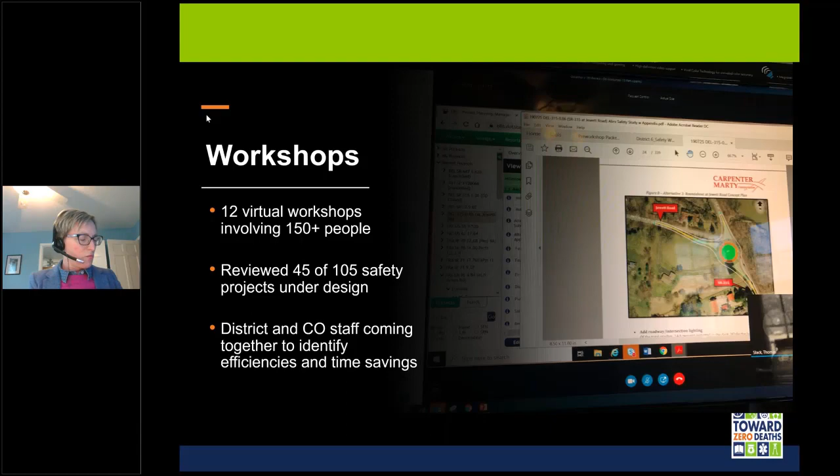And from here, I'm going to let my co-host or co-presenter today pick up the story. And while he's getting prepared to make his remarks, let me give you just a brief bio. So Scott is actually a longtime friend of ODOT safety program. He's been working with us going all the way back to the early 2000s. He is currently Vice President of Crawford, Murphy, and Tilly, and serves as the Ohio Surface Transportation Group Manager. He has more than 28 years of planning and design experience, applying performance-based practical design concepts on projects ranging from interstate to local roads, as well as urban and rural environments. He leverages national best practices and emerging safety research to identify innovative solutions. He's also a graduate of the University of Dayton. So Scott, I will let you pick up the story from here. Great, thank you very much, Michelle.

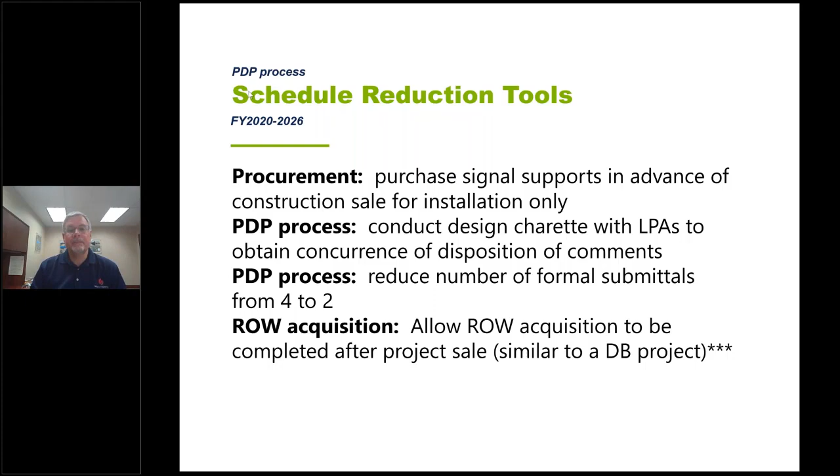The other item I'd share was a focus of the workshops: a discussion about primary and secondary countermeasures. The second question addressed was, are the solutions or countermeasures that increase the schedule critical to the safety goals of the project? This discussion not only has schedule implications, but also cost implications.

The strategy was to limit solutions to primary countermeasures to help expedite the safety benefits of the project. Clearly, if a primary countermeasure does warrant additional environmental work or property acquisition, which may lengthen a typical safety project, the goal is still to implement those countermeasures that provide the most benefit. I think what was a focus, though, was those secondary countermeasures.

Those can be introduced a couple of ways. Clearly in the study phase, there may be some countermeasures proposed, some more effective than others. But a scenario that does occur is where once the study is completed and it goes to design, there are often questions asked: why aren't we doing X, Y, or Z as part of this safety program or project that should be addressed?

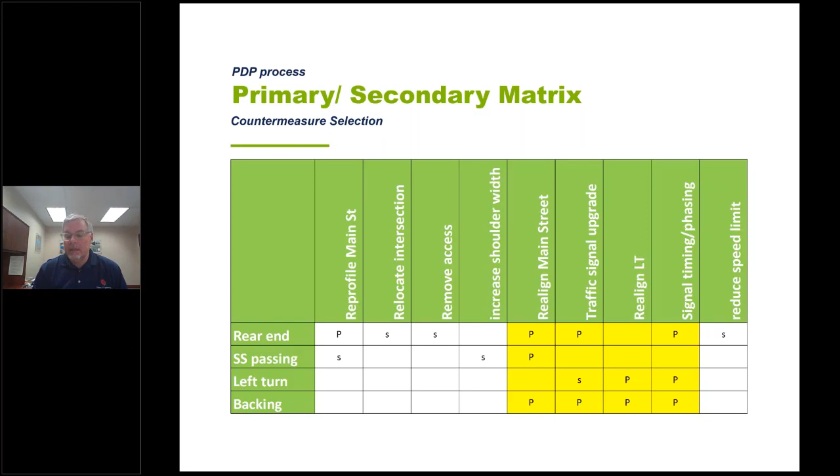So just a real quick rundown on a few examples to demonstrate this primary-secondary issue. One deals with right-of-way. On this particular project, the countermeasure was the construction of an exclusive right turn lane, actually on two approaches.

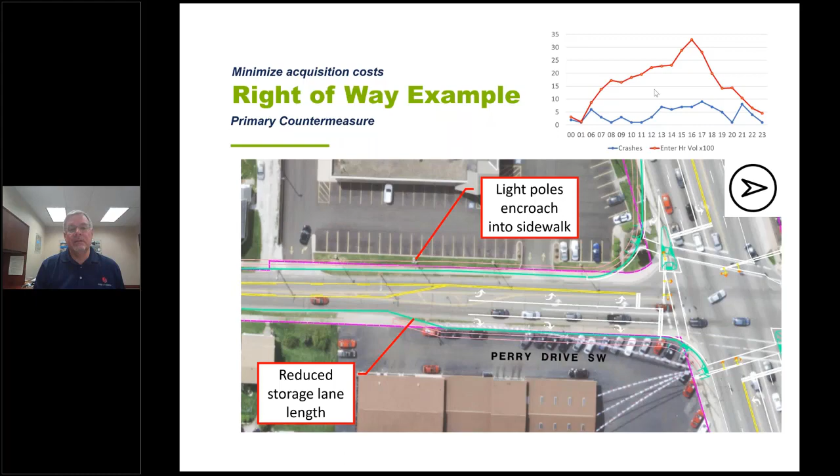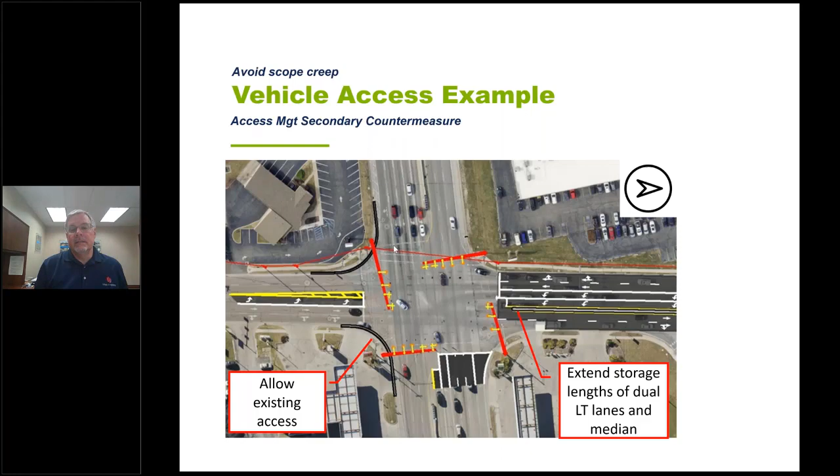The existing design was diagonal, such that left turners did not have a good view of the signal head when turning left permissively. The scope of improvements did not include pavement upgrades. As part of the design detail, poles were set to avoid impacts caused by turning trucks, but not necessarily resulting in a pavement upgrade project.

The decision here was that we did want to accommodate pedestrians better in the form of pedestrian signal heads, but we moved forward with a minimum PED timing on both approaches, since the volumes on these roadways were fairly equal. There wasn't really a major or minor street to favor, so it did not necessarily require the additional concrete sidewalk and ramp construction typically needed to accommodate pedestrians at this location, and there was no need for buttons or access to buttons.

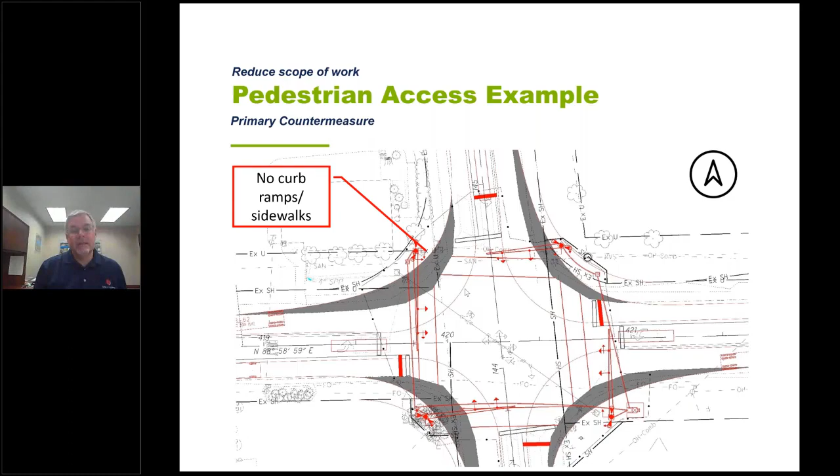As part of the study, it was determined that while the vertical clearance did not meet criteria, there were no crashes attributed to that issue. So from a primary versus secondary countermeasure perspective, the safety improvement focused on the directional ramps and did not address the existing vertical clearance issue.

So with that, that is the extent that I'll share with everyone, and we'll have more examples that resulted from the workshop. Great, thank you, Scott.

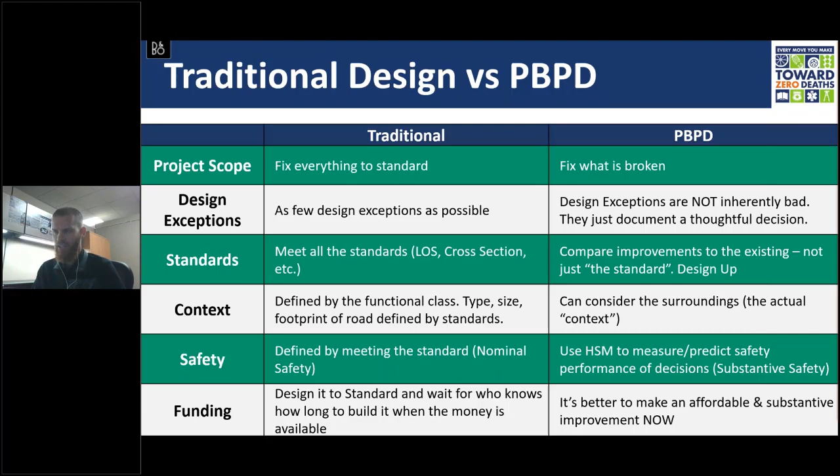PBPD uses the Highway Safety Manual, or HSM, to measure and predict the safety performance of the decisions being made. The HSM allows for a designer to quantify the impacts to safety that each alternative has. The most important benefit PBPD has over traditional design approaches is that it can yield an affordable solution that could be implemented now, instead of creating a solution that, while may meet all the standards, becomes so costly that nothing can be done until funding is available.

PBPD can occur throughout the project development process, or PDP. The decisions related to PBPD should consider and balance the benefits, disadvantages, costs, and impacts. And there are several key tenets to PBPD.

First and foremost, safety will not be compromised. With the ability to quantify the impacts and measure the benefit of mitigation strategies, solutions should not introduce or exacerbate a safety issue. For PBPD strategies, the existing condition is often the minimum standard, and the project will look to improve upon the existing condition.

The project's purpose and need should address specific problems supported by data, and the design should adhere to the purpose and need. The PBPD solution should be consistent with the context of the corridor that maximizes the benefit-cost ratio as an optimized combination of mobility operations and other modes.

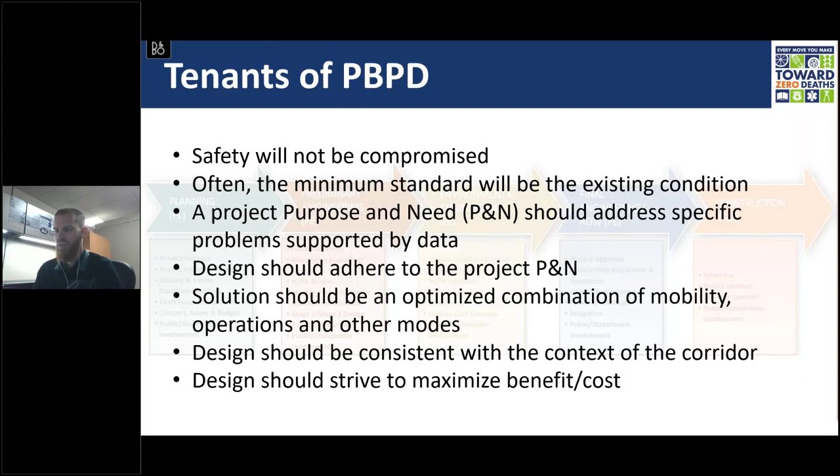So let's break down the PDP and identify how PBPD can be implemented in each phase. In planning, PBPD establishes the need for a project by focusing on improving the critical items and not those that aren't impacting safety or operations.

This becomes the framework for defining two different needs for a project, which Scott covered in his presentation as well. But the primary needs are those elements that are truly causing the problem. The project must address these to the greatest extent possible. Secondary needs are those elements that may not meet standards but are not causing undue issues. The project may or may not address these depending on cost or impacts created by addressing them.

It is very important during scoping that these needs are identified and the delineation between primary and secondary needs for the project are well defined.

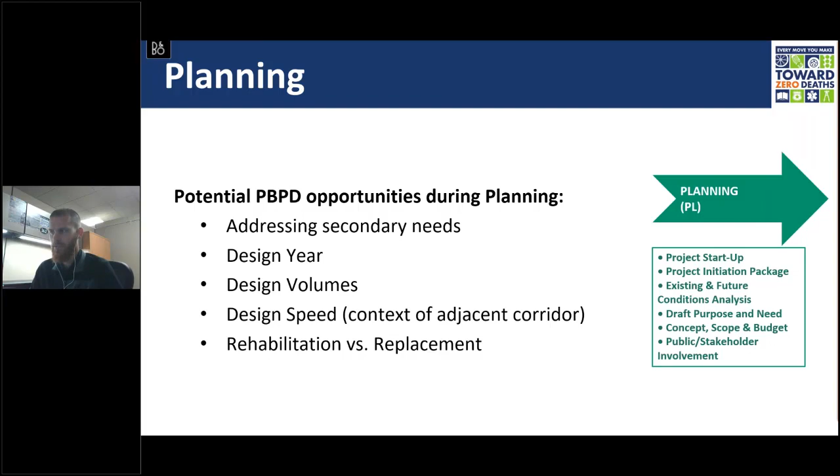There are several opportunities to implement PBPD during planning. Adjusting the design year for the project can offer beneficial solutions, especially when the growth projections come with a lot of uncertainty or if there is an opportunity to phase a solution. This can lead to adjustments to the design traffic volumes as well. Design speed is another aspect that can be investigated to be modified for a project depending on the context of the adjacent corridor.

During preliminary engineering, PBPD can be implemented during the feasibility study and alternatives evaluation report, or AER, phases. As a reminder of ODOT's PDP, the feasibility study and AER are used to evaluate alternatives to address the purpose and need, including impacts and costs associated with addressing the secondary needs.

PBPD decisions should be made in collaboration with all the appropriate disciplines, process owners, and approvers to avoid making any fatal flaw decisions and having to backtrack later in the process. This is the time to ensure that ODOT's Office of Roadway Engineering, Safety, and Environmental Services at a minimum are engaged and on board with the decisions being made.

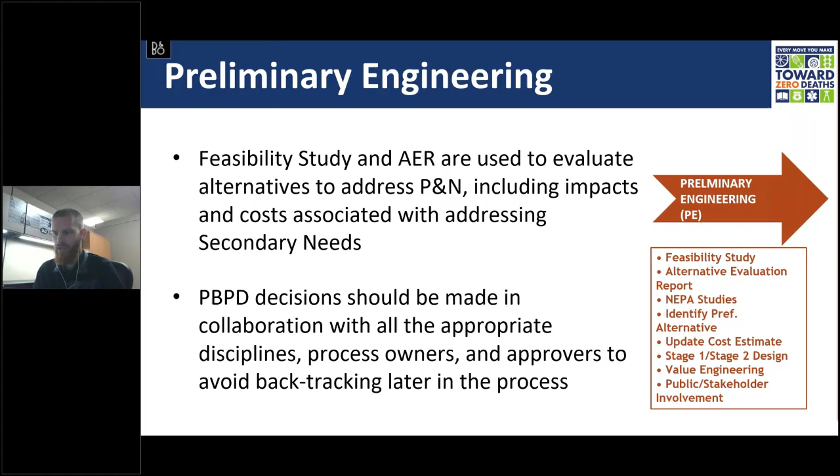During preliminary engineering, as alternatives are being evaluated, designers can evaluate opportunities to introduce PBPD strategies in three categories. Operational performance could mean adjusting level of service requirements or modifying access control requirements near an interchange. Alternatives could mean evaluating different facility types or introducing unconventional or alternative intersections in lieu of grade separations and interchanges. Geometrics could mean evaluating different ramp terminal spacing opportunities, addressing inside merges, or removing left exit or entrance ramps.

At this stage, the designer and team need to decide what is practical for the project to address. In the design phase of the PDP, it requires a departure from the traditional mentality that said meeting design standards was a metric of measuring success. While meeting standards is a worthwhile goal, the cost of meeting all the standards may be prohibitively expensive or impactful.

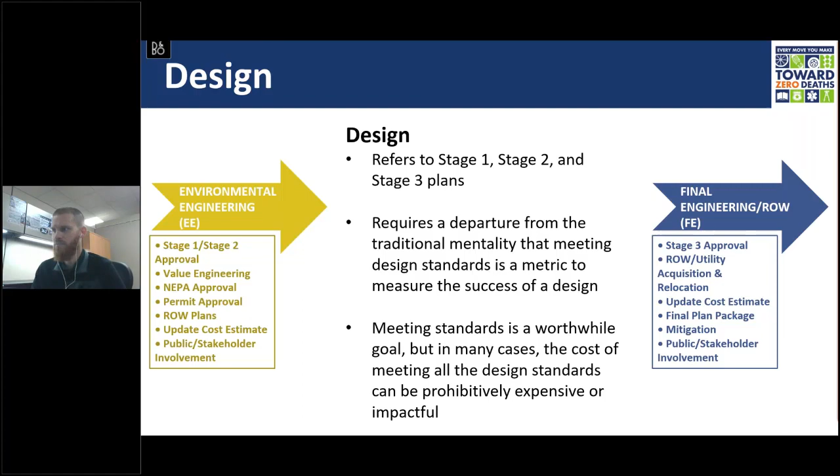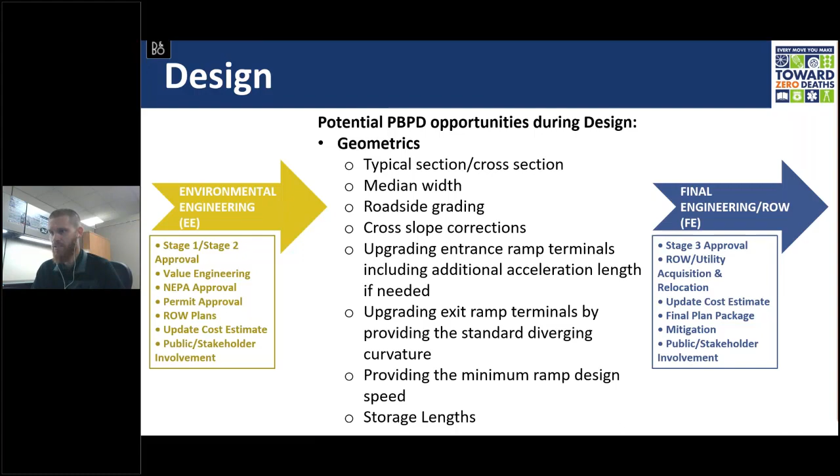During design, PBPD opportunities include adjustment to the typical section, median width, cross slope, entrance and exit ramp geometry, grading, storage lengths, and many others. These are all areas that can be evaluated based on the crash history to determine if they need to be improved from the existing condition and to the degree at which they need to be improved.

During this phase of the PDP, documentation is critical. All deviations from the standard should be based on sound engineering judgment and be well documented. This is normally done through the design exception process. Design exceptions are the formal approval process to evaluate and document decisions when deviating from the controlling criteria.

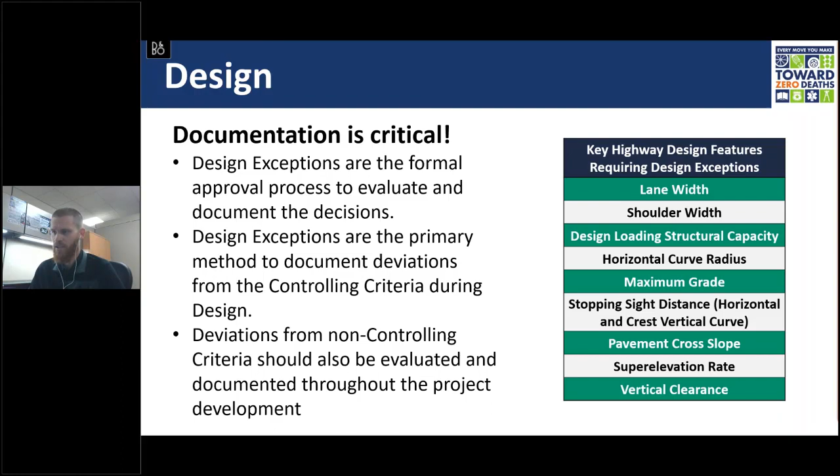And when thinking about PBPD and controlling criteria, don't just jump straight to a design exception without thinking through the possible solutions that could be implemented. And it should be noted that deviations from non-controlling criteria should also be evaluated and documented throughout the project development.

So we have ways of determining the impacts of every decision we're making now using highway capacity analysis software, the highway safety manual, vehicle tracking and lane keeping software, and traffic simulation models.

PBPD is not the complete disregard of the standards. It is not always violating standards because it's cheaper. It is understanding safety ramifications for different decisions that are made during the project. What impacts do you avoid that allows you to determine the benefit-cost ratio? Are you still meeting the purpose and need? And does meeting the standards fit the context?

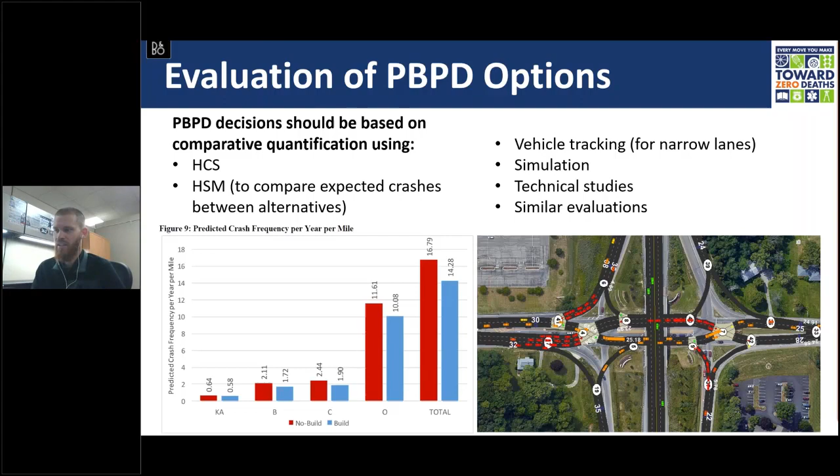When selecting a PBPD solution, analyses should be conducted to compare the safety performance of the PBPD solution with the existing condition. Using the HSM, the predicted or expected crash frequencies can be compared to the existing and PBPD conditions. In general, it's not desirable to have an increase in crashes as a result of the PBPD solution.

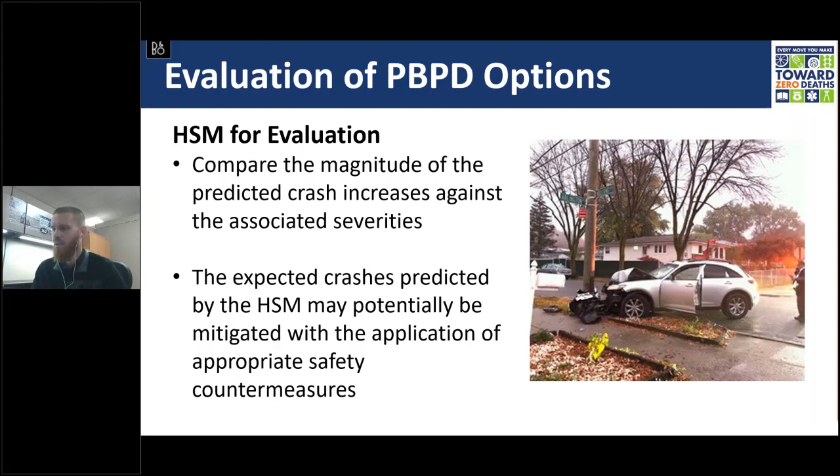However, if the increase is only in property damage only crashes, it may be an acceptable solution. If fatal or injury crashes are increased over the existing conditions, other countermeasures should be explored to further reduce those types of crashes. And countermeasures should be evaluated until the proposed solution has fewer fatal and injury crashes than the existing condition.

Section 1003 of L&D Volume 1 provides several potential secondary needs that PBPD can look to address, including geometric opportunities such as the conversion of a left-hand ramp to a right-hand ramp, widening the shoulder on the outside of a horizontal curve to standard width, improving the vertical clearance, improving super elevation rate, or incorporating strategies to manage access through the inclusion of medians or right-in, right-out islands.

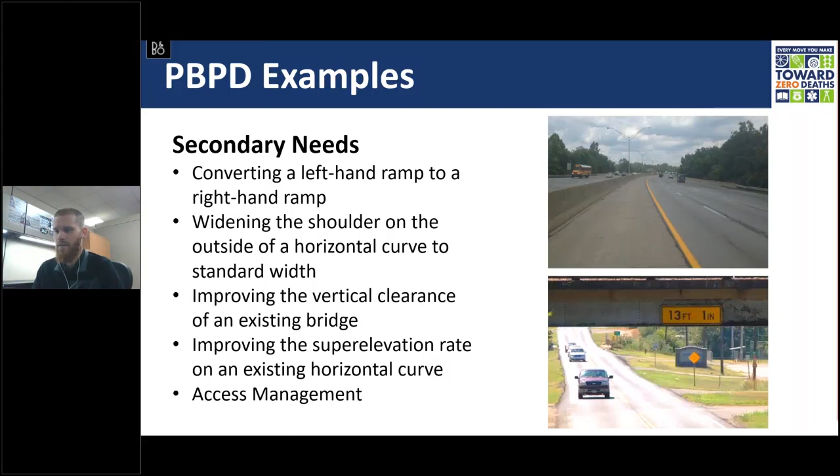PBPD strategies to improve capacity could be reducing the level of service criteria to improve the capacity of the corridor over the existing, but not to the preferred performance metric, reducing the design year horizon to less than 20 years, or investigating a phased approach that implements an alternative intersection in the short term rather than an interchange that may be ultimately required. So let's get into a few examples.

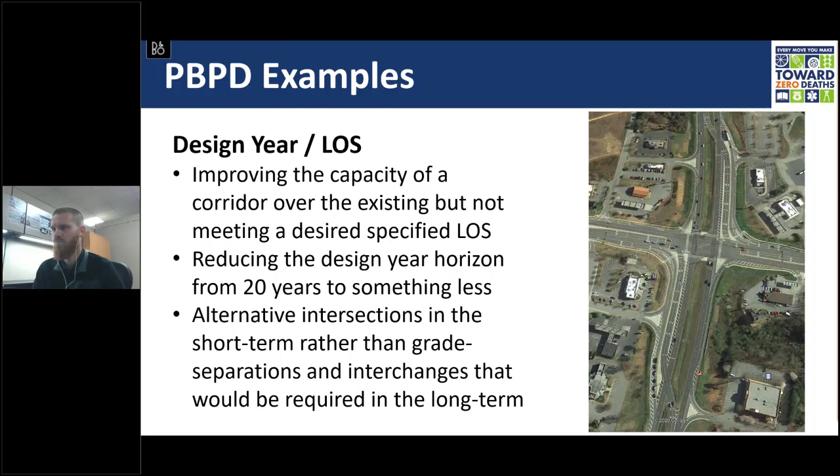Here's an example in Greene County along US 35 where an interim solution was proposed while funding for the full build alternative is being obtained. The ultimate fix at these two at-grade intersections is a $120 million grade separation interchanges project. That kind of money just isn't available. An interim solution that was recommended as part of the PBPD process was the implementation of a super street.

This super street concept was far superior to the existing condition when measuring traffic operations and safety performance, but it wasn't as good as the interchange concept. The super street was estimated to cost $15 million. So is it better to make a lesser improvement now, or do nothing while we wait for money to appear?

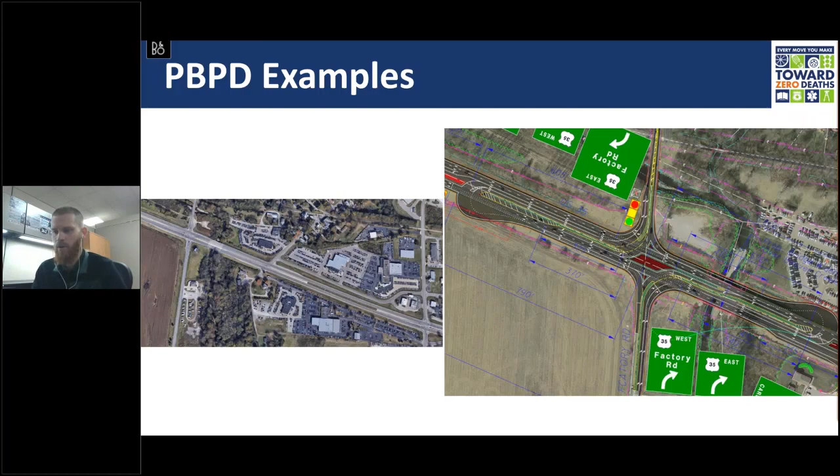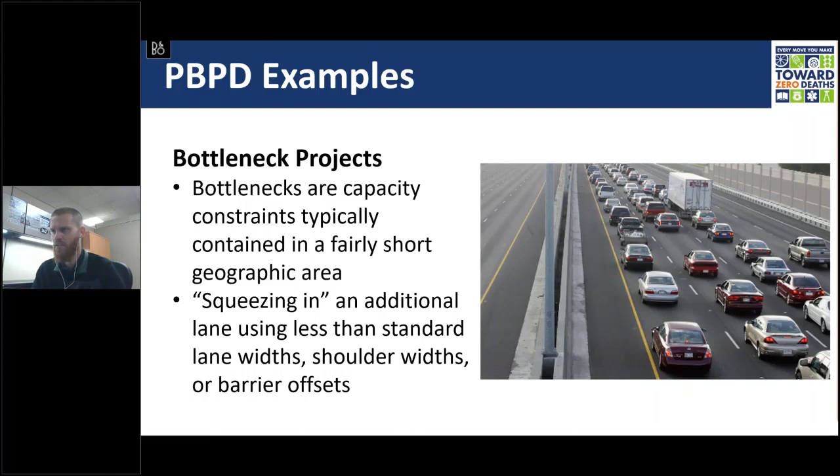Projects that address bottlenecks are good opportunities to investigate PBPD solutions. Bottlenecks are capacity constraints typically due to not enough through lanes or poor lane continuity along a roadway, often over a short segment. PBPD opportunities include utilizing less than standard lane widths, shoulder widths, or barrier offsets to squeeze in an additional lane. So here's an example of a bottleneck project in Akron.

To improve this segment by widening to 3 lanes in each direction to meet standards would require the reconstruction of the entire interchange, including the middle and top level bridges, which would have cost about $90 million to implement. A PBPD strategy was evaluated to reduce lane widths and shoulder widths through this section to squeeze in the additional lane. Understanding the context of the project, the geometrics, and the crash history led to this proposed solution.

With this being a tangential alignment, the narrow lanes aren't expected to cause lane departure or off-tracking issues for trucks. The existing shoulders don't provide emergency pull-off areas, and neither will the proposed. Narrowing the proposed shoulder widths doesn't reduce the horizontal stopping sight distance, and the cost to squeeze in this additional lane was $5 million.

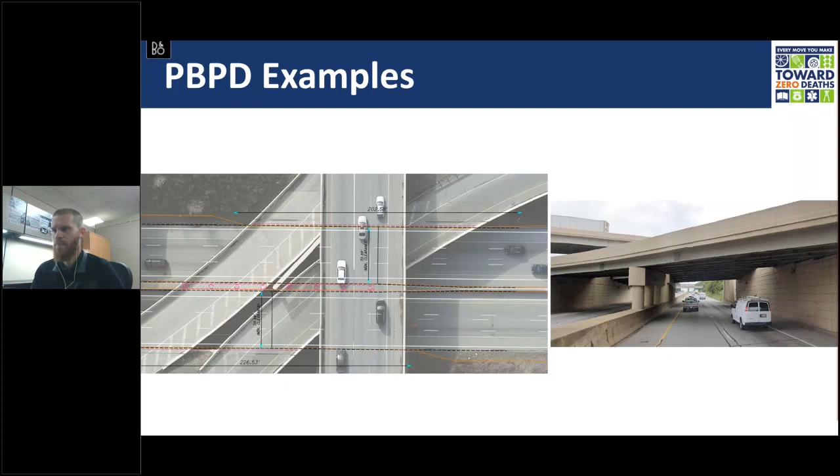Here's another example of a bottleneck project in Cleveland. This is along a 3-mile stretch of Interstate 480 that had significant congestion and safety issues. Adding an additional lane of capacity using traditional widening strategies that meet design standards would have required $50 million due to the number of bridges and interchanges in the corridor.

A PBPD strategy identified reducing the travel lane width from 12 feet to 11.5 feet and reducing the shoulder width to squeeze in the additional lane. The exit gore was reconfigured to include a drop decision lane to allow 3 lanes to continue along I-480 past the exit gore, providing another lane of continuity along 480. And this only cost just under $5 million.

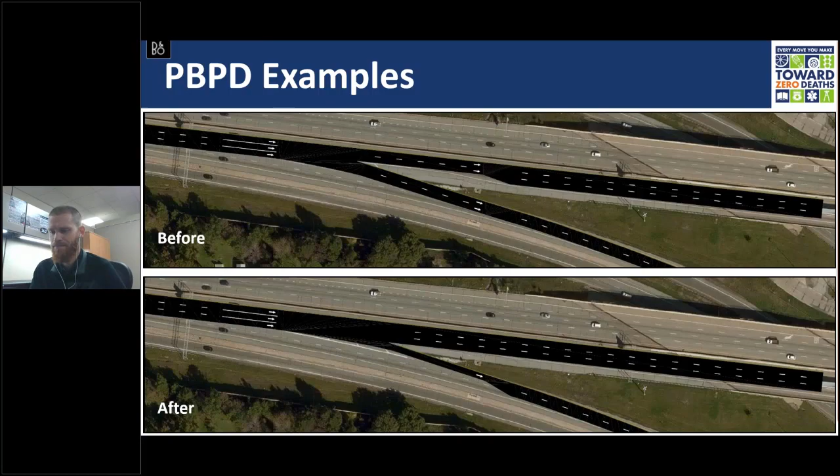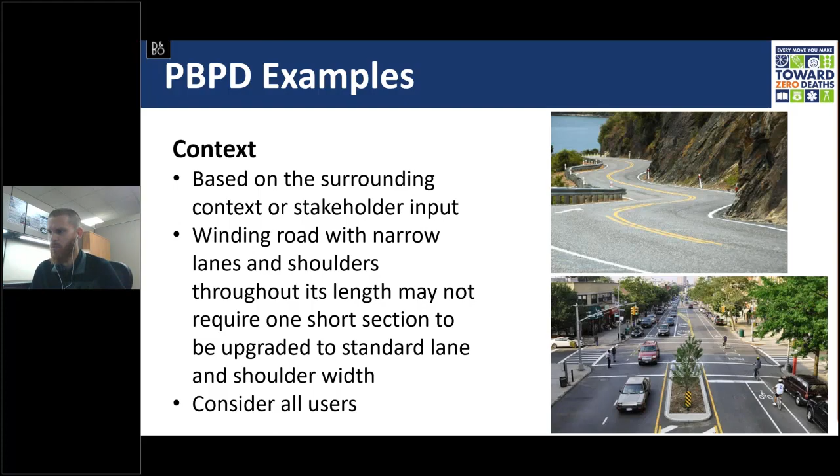Think about the context of the project area and adjacent sections when considering PBPD opportunities. For example, does it make sense to improve shoulder widths and lane widths to meet standards for one horizontal curve but leave others as is? You have to look at the crash history when answering this type of question. If crashes are spread over the entire corridor, look at the likely causes and target improvements to fix those. Remember there can be multiple users of a facility, and giving too much emphasis to one user may degrade the function for others.

PBPD is not the same as value engineering, but the PBPD philosophy and VE process are complementary. VE is an analysis of materials, processes, and products from which a selection may be made to achieve the required function at the lowest overall cost, consistent with requirements for performance, reliability, and maintainability. PBPD is the overarching approach that guides planners, programmers, and engineers to focus on performance improvements that benefit both project and system needs. PBPD and VE share the similar goal of achieving the greatest benefit-to-cost ratio. However, VE typically focuses on the decision within a single project, while PBPD considers the decision within the context of improving the overall system.

So there you have it, performance-based project development in a nutshell. Here are the key takeaways: the purpose and need, and clearly breaking the needs into primary and secondary needs, is very important. Coordinating with the appropriate disciplines, offices, and process owners is critical to the success of the project. Documentation is key, and remember, it's not just design exceptions, but documenting any design variation that may not meet the required standards. Applying PBPD principles will help you develop a design that targets and fixes what is broken and allows for fundable improvements to be implemented.

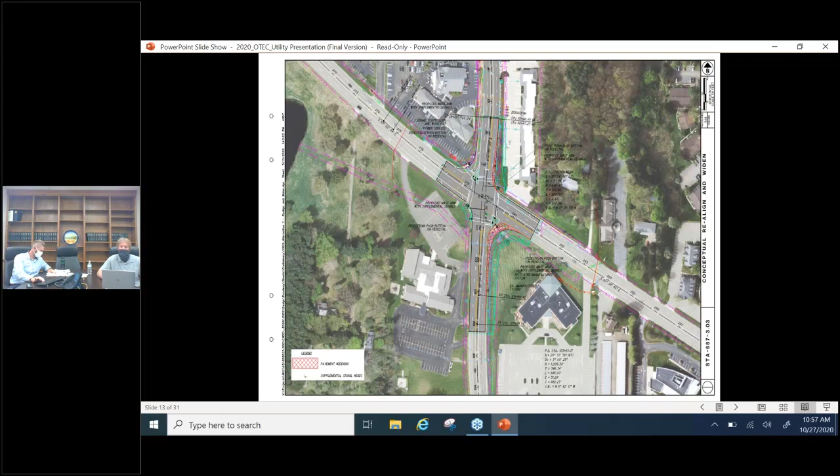This is the conceptual layout of the intersection. You can see the slight realignment of one lane of the intersection, as well as the pork chop islands for proposed right turn lanes. Although it's difficult to see, we have the location of our proposed mast arms, some preliminary drainage, and preliminary right-of-way lines.

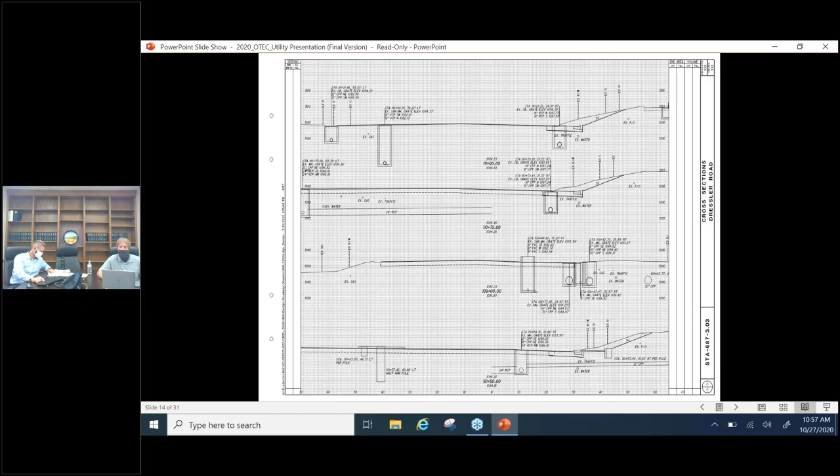Our design consultant also provided cross sections. This is an example of one of the cross section sheets that was provided. As you can see, the cross sections show the existing underground utilities, as well as drainage features and the foundations for the mast arms and ped poles, which help the utility company see how the facilities would be impacted by the project.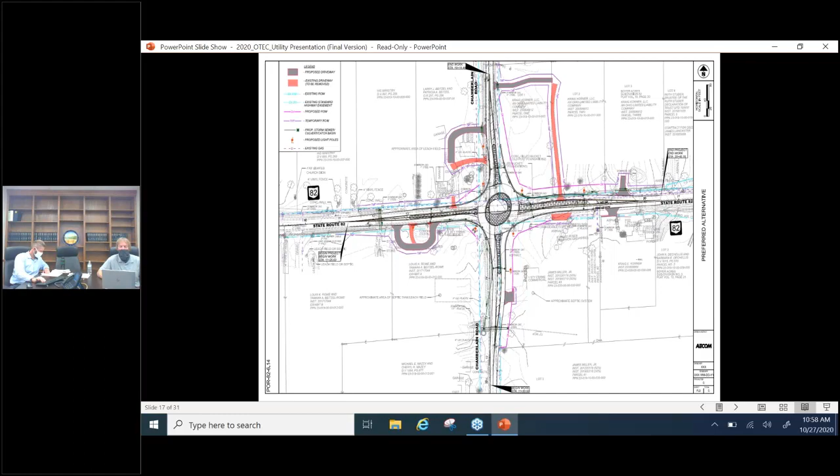This is the preferred alternative for the project. It shows the layout of the roundabout, and as you can see in the legend, we showed some preliminary right-of-way lines, the preliminary storm system, and the preliminary light pole locations.

That brings us to the utility kickoff meeting itself. At this meeting, we wanted to make sure we discussed the following items: the project schedule, the answers to the three questions asked in the kickoff letter, an open discussion with each utility about their facilities, verifying the utility contacts to make sure information is being sent to the right person at the right address, finding out what format each company would like for future plan submissions, and discussing the need for any test holes.

When talking about the schedule, I like to provide the utility companies with the whole schedule to show how the project will be developed. I also like to highlight all the important dates that have utility involvement, such as the right-of-way dates, as well as dates for future meetings.

After the review of the stage 1 plans, we have another utility meeting. This is probably the most important meeting on the schedule because it'll be the last time that we'll make adjustments to the proposed right-of-way limits for the project. I call it the Speak Now or Forever Hold Your Peace meeting.

After this utility meeting, we finalize the right-of-way tracings and begin right-of-way acquisition. We also put a date for when we'd like the utility companies to submit the relocation plans, so they know this up front. We also let them know when the right-of-way acquisition will be complete, so they know when they can begin their relocations.

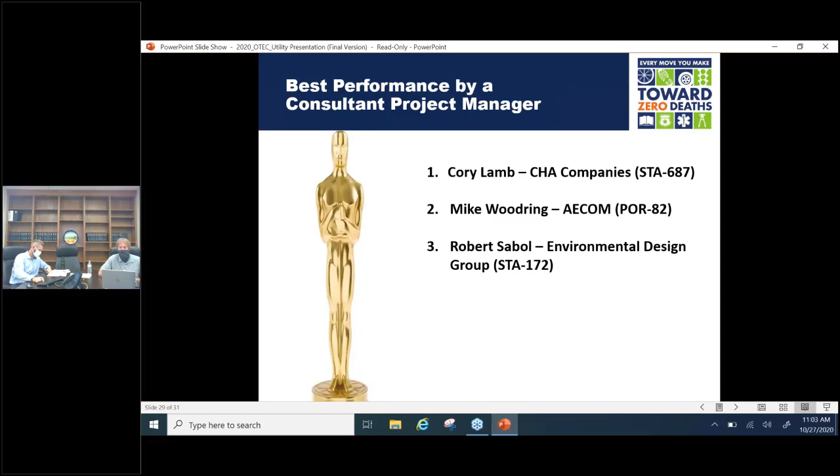For the category of best performance by a consultant project manager, the Oscar goes to Cory Lamb with CHA Companies for his work on Stark 687, Mike Woodring with AECOM for his work on Portage 82, and Robert Sabol with Environmental Design Group for his work on Stark 172. And even though we didn't talk about this project, Robert is doing a great job like Cory and Mike. These are the gentlemen that really made things happen. They bought into what we were trying to accomplish with these projects, and they did a great job coordinating with the utility companies and working with our task order consultant to get the right-of-way plans developed.

And finally, for the category of best performance by District 4 staff, the Oscar goes to Elizabeth Stoper, who is a project manager for all three of these projects, Matthew Seal, our district utility coordinator, and Brian Peck, our environmental specialist. Even though we didn't need to have environmental cleared for these projects to begin right-of-way acquisition, Brian jumped on these projects early to make sure there'd be no environmental issues.

Tim Ward from our right-of-way department is the person that suggested we could skip the preliminary right-of-way submission and go straight to final right-of-way plans, which led us to try this process. And Laura Beese, our district design engineer, is the person who came up with the idea to make the utility note a working document. These are the district folks that made trying something different on these projects possible.

Well, that's all I have. I want to thank everyone for their time. And if you take only one thing away from this presentation, I hope that you remember, okay, let's say it one more time. Utilities are your friends.

I love it, I absolutely love it. Thank you, and I would also say utilities are your friends. Dan, you did a really nice job of laying out tools and techniques people can use to specifically engage utilities in this process. And Chad, thank you for reminding us that when you encourage your experts to explore new ideas, you get different results. So thank you both for that.

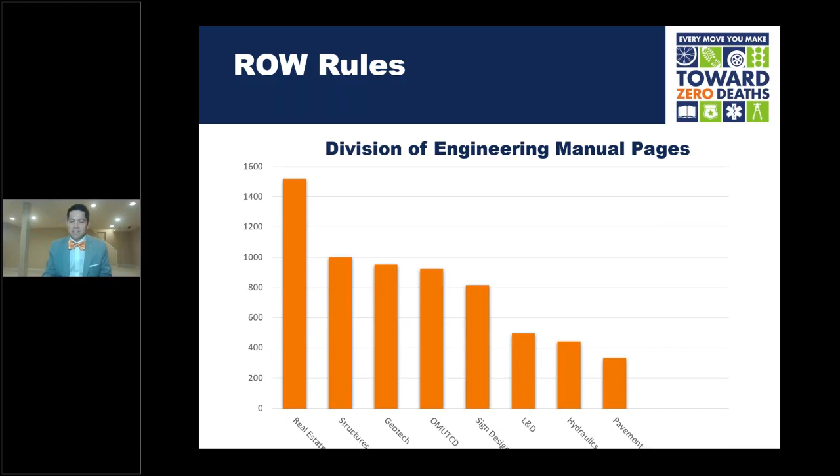So I wanted to highlight at least two opportunities that we want to talk about being able to move right-of-way forward in the process. There's one that I want to highlight and go into a little bit more detail. But both of these options really have in common that the right-of-way acquisition process starts earlier in the project. And what do I mean by earlier? I mean, it's going to happen before the NEPA document is completed. But there are differences beyond just the funding source.

So the first option we call federally funded early acquisition. This process is great because it gives you the opportunity to preserve all of the federal funding for right-of-way acquisition. This gives you added time to be able to complete parcels. Maybe they're going to take longer, maybe they're a complicated take, maybe there's a relocation on that parcel. But we think this might be most useful when you believe that the property owners are already on board with the project. But it's not all good news.